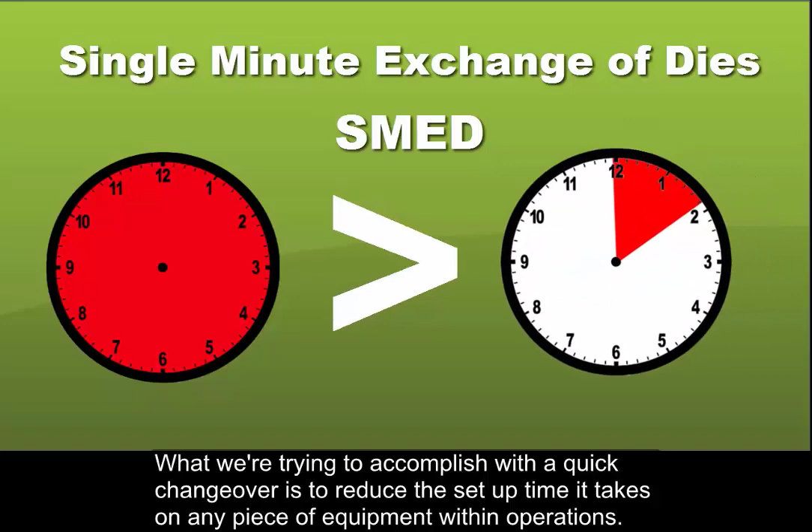What we're trying to accomplish with a quick changeover is to reduce the setup time it takes on any piece of equipment within operations. With this, what we're trying to do is get down into the single digits of time when we talk about single minute exchange of dies. So if you think about a single minute or a single digit, that's 9 minutes or less.

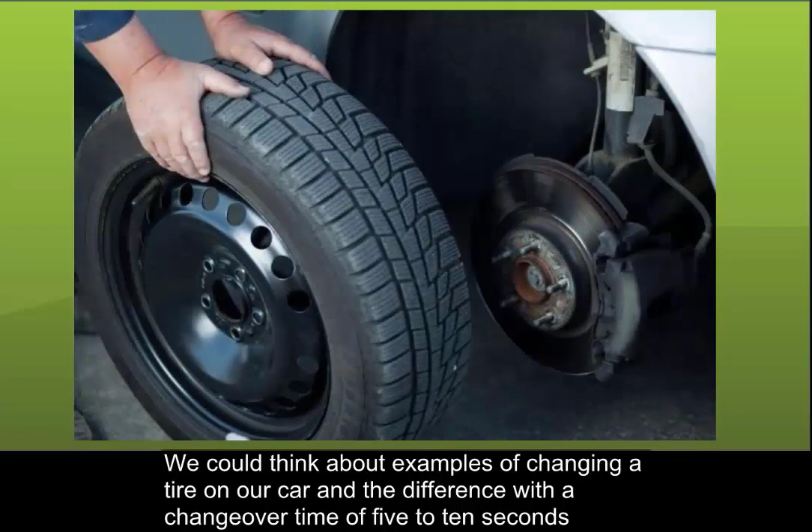We're trying to take changeover times that are often 4 hours, 5 hours, or longer and reduce those down to the single digits. So we could think about examples of changing a tire on our car, and the difference with a changeover time of 5 to 10 seconds if we think about pit crews.

SMED was developed by Shigeo Shingo at Mazda, Mitsubishi, and Toyota in the 1950s and 1960s. Shingo spent 19 years observing different setup operations in various factories. The methodology was initially developed to improve die press and machine tool setups.

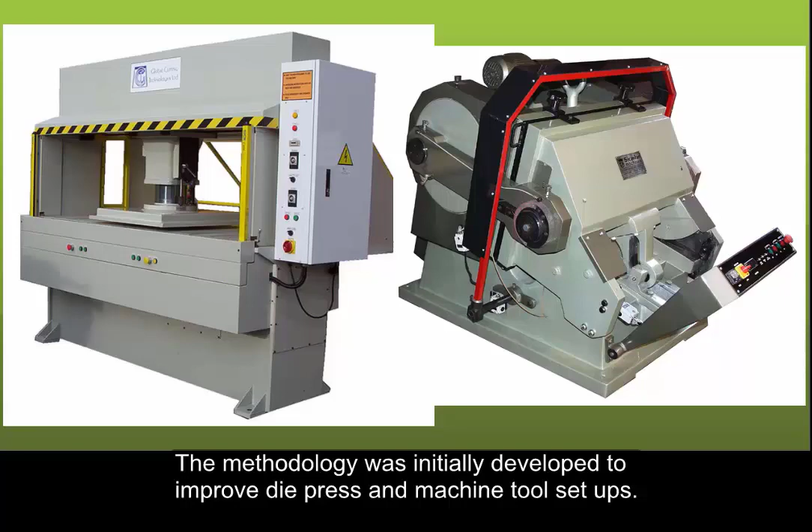These setups often took multiple hours, typically 6 to 8 hours, and the goal was to reduce this to a much shorter time in order to increase the number of changeovers and run products more frequently.

SMED is a key concept in lean operations because oftentimes the mindset is such that we don't want to change over and run a new product because a changeover takes too long. However, we can reduce that changeover to a much smaller time and down to minutes. Then we can change over and run products more frequently. And by running products more frequently, we can hold less inventory on hand.

Another key aspect of this is that we can meet customer demands quicker. For example, if a customer calls and they change their order today for what they want delivered tomorrow or the next day, we can change over quickly in a more timely fashion.

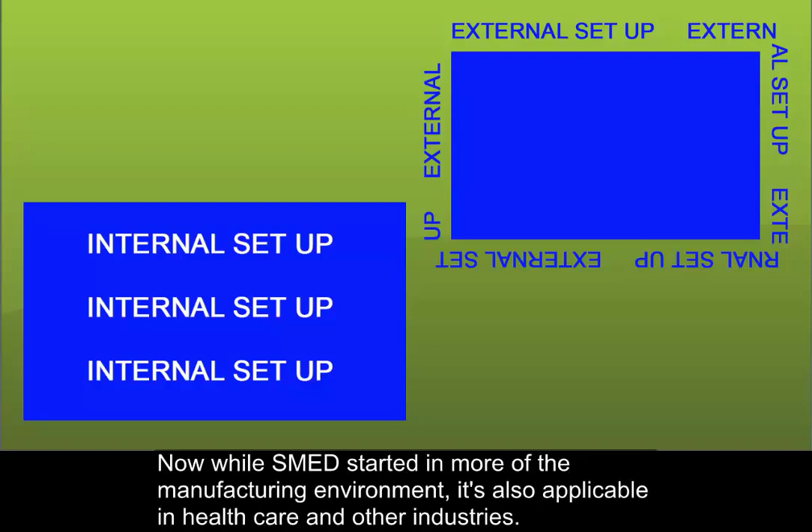There are two key points with SMED. The first is that setup operations can be divided into two categories: internal setup and external setup. Now, while SMED started more in the manufacturing environment, it's also applicable in healthcare and other industries. When we think about SMED, it's probably easiest to first think about it in terms of manufacturing.

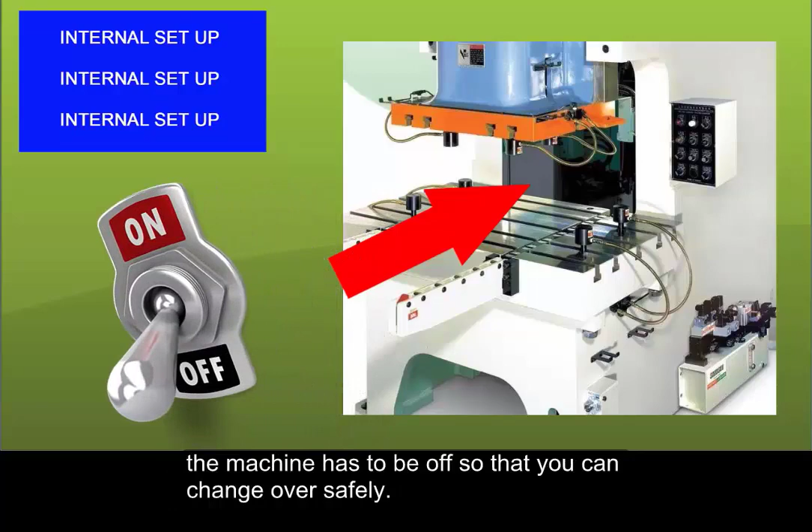With internal setup, these are changeover operations that are internal to the machine. What this means is, in order to make changes, the machine has to be off so that you can change over safely.

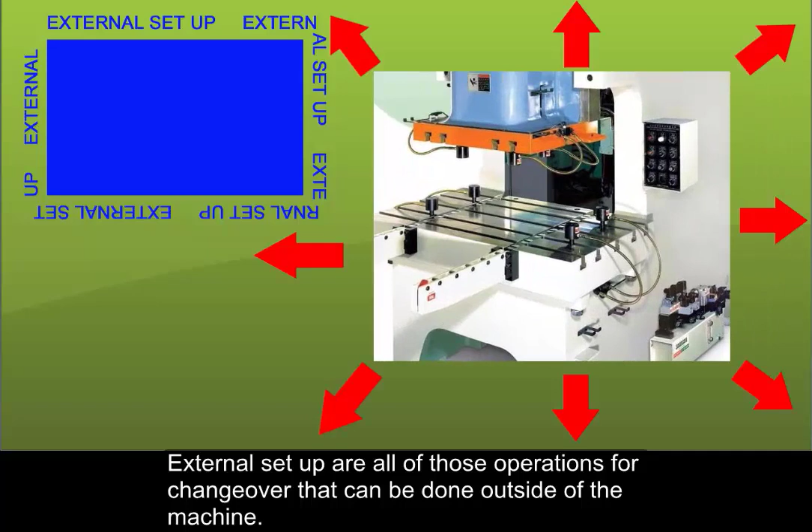External setup are all of those operations for changeover that can be done outside of the machine. For example, you can get all of the tools and equipment ready before you shut down the machine.

If we think about this in other industries such as healthcare, if we're changing over an operating room, there are certain things that we can have prepared outside of the machine, such as all of the instruments for the next procedure. These can be done externally.

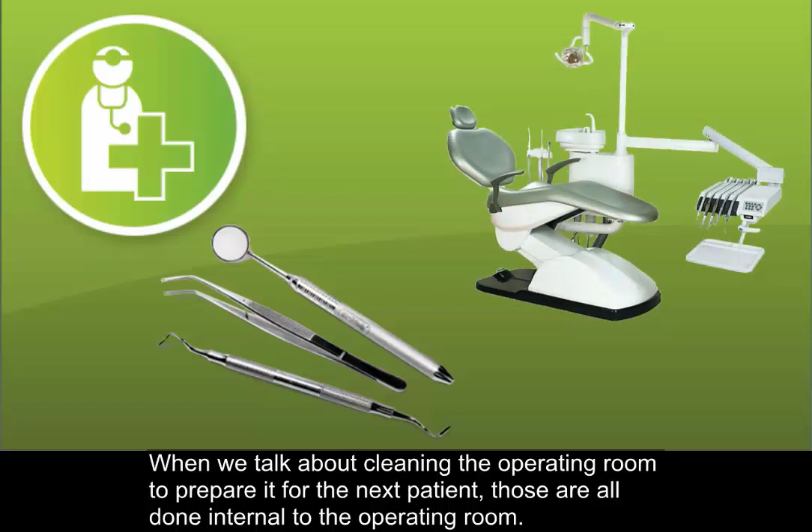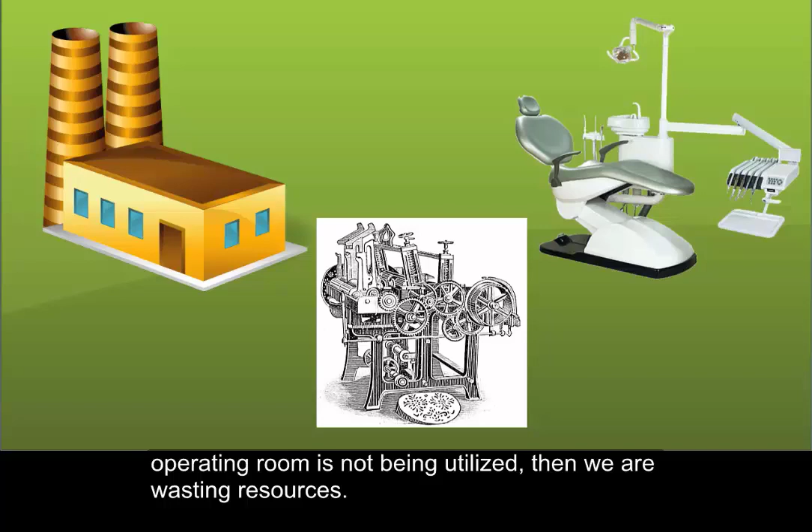When we talk about cleaning the operating room to prepare it for the next patient, those are all done internal to the operating room. Now, if we think about the common mindset within manufacturing, if a machine is down or a resource such as an operating room is not being utilized, then we're wasting resources.

Now, on the flip side, we also want to make sure that we're not overproducing, which is another waste within lean. This leads us to the second main point with SMED. Converting internal setups to external setups can substantially reduce the changeover times.

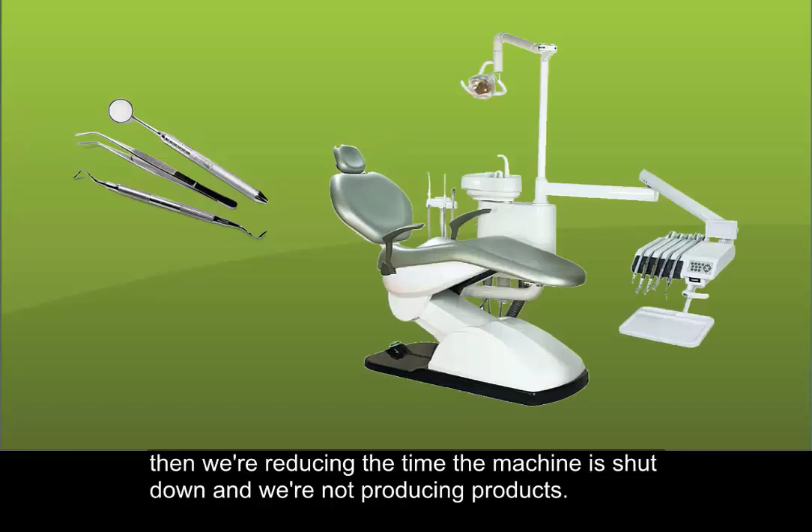If we can have all of the equipment and fixtures ready to go before we shut down the machine, then we're reducing the time that the machine is shut down and we're not producing products. And so we want to convert as much of the internal time to external time.

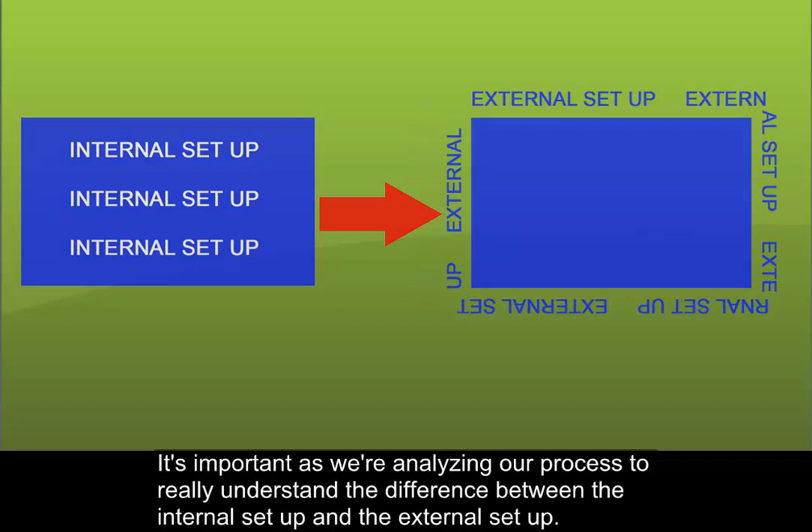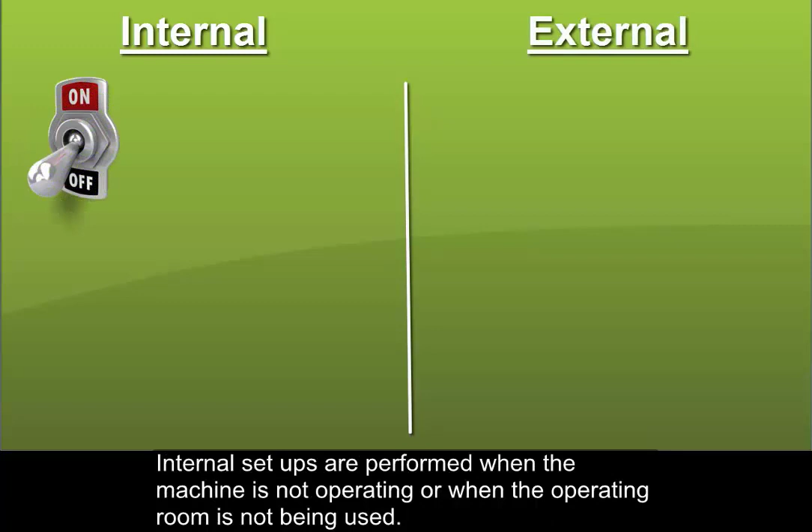It's important as we're analyzing our process to really understand the difference between the internal setup and the external setup. Internal setups are performed when the machine is not operating or when the operating room is not being used. External setups are performed while the machine is running.

In terms of healthcare, this would be setting up for the next procedure while the current procedure is finishing up. By converting our internal setups to external setups, we're reducing that overall changeover time, which increases the time that machines can operate or resources can be utilized.

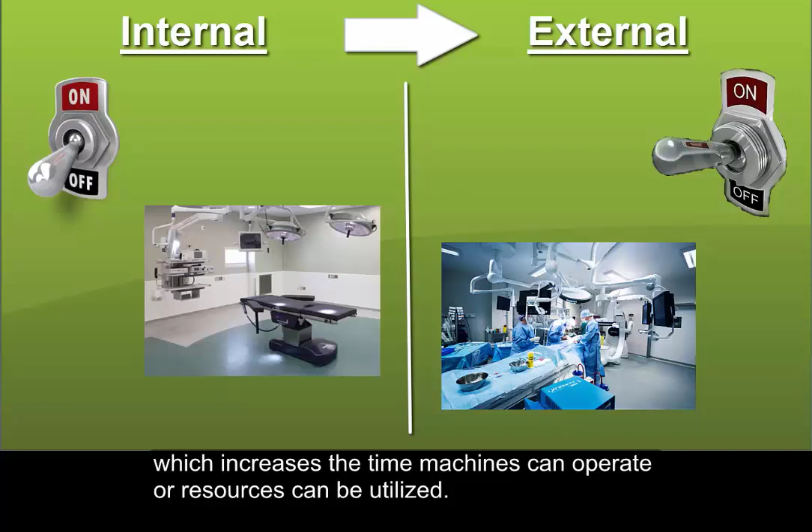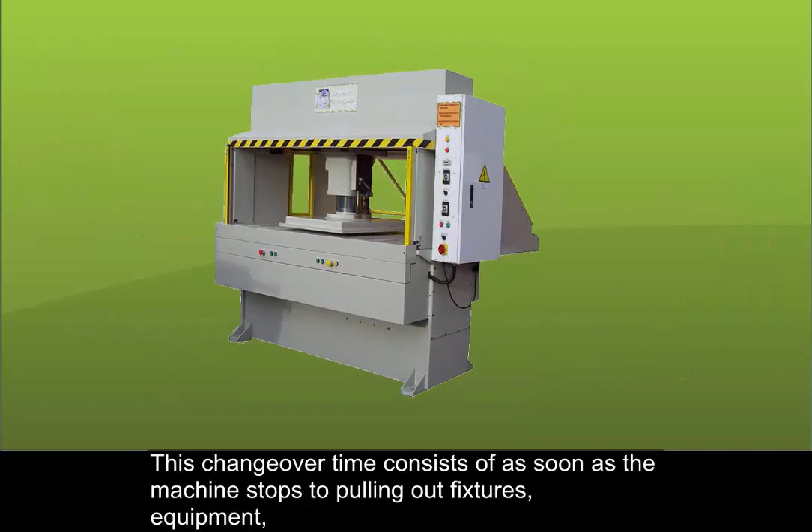Another key aspect is when we look at our changeover time, our total changeover time is captured from the last good piece of one product to the first good piece of the next product. Any time between that is time that's lost. It's wasted time.

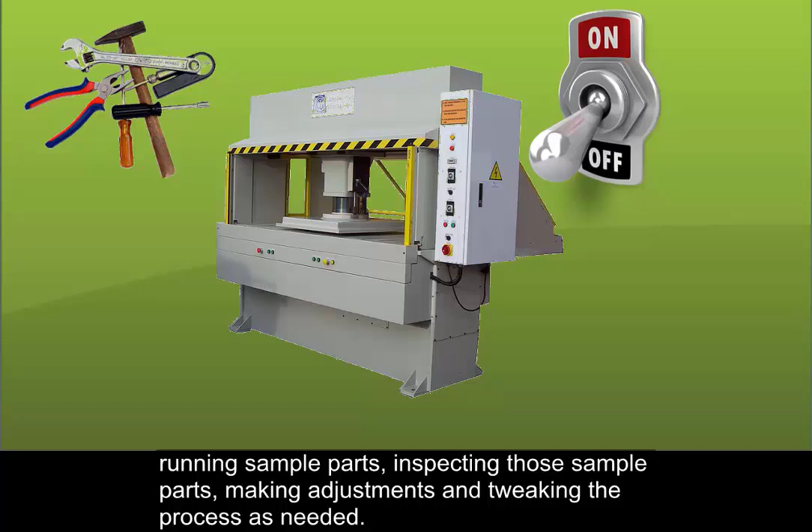This changeover time consists of, as soon as the machine stops, pulling out fixtures, equipment, running sample parts, inspecting those sample parts, making adjustments and tweaking the process as needed, and then re-inspecting parts until the process is finally able to produce a good part. The goal then is to reduce that overall changeover time.

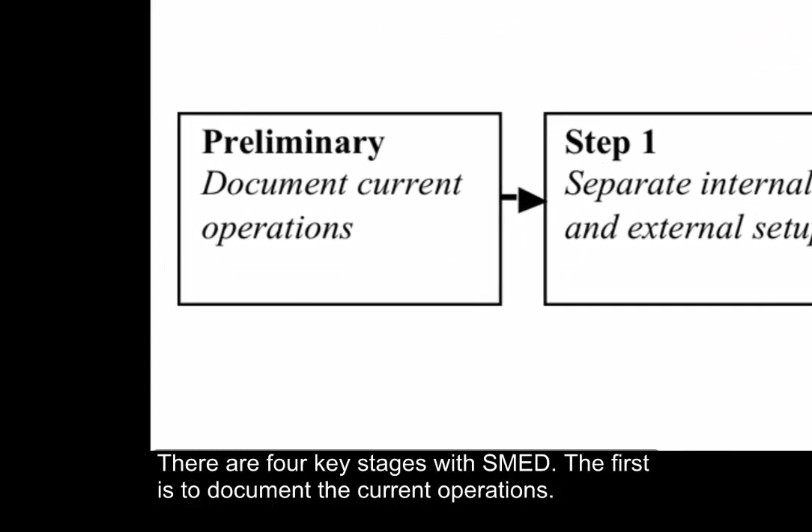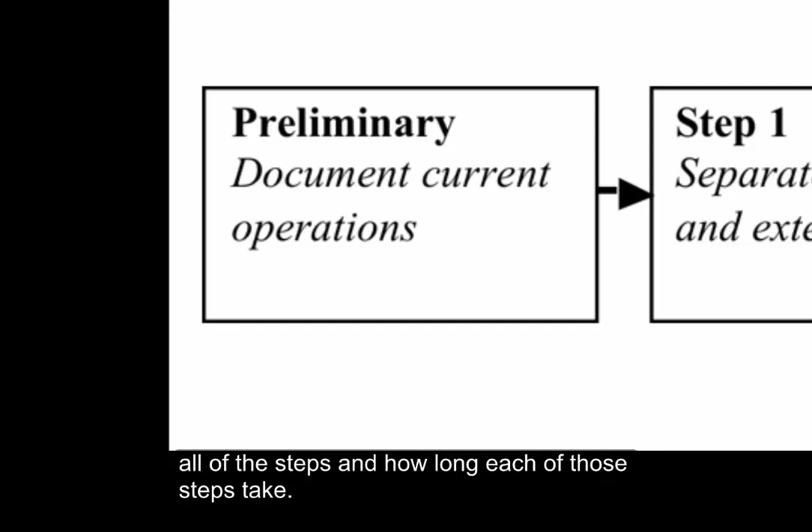There are 4 key stages with SMED. The first is to document the current operations. One best practice would be to videotape the current operations so that you can get a detailed analysis of all of the steps and how long each of those steps takes.

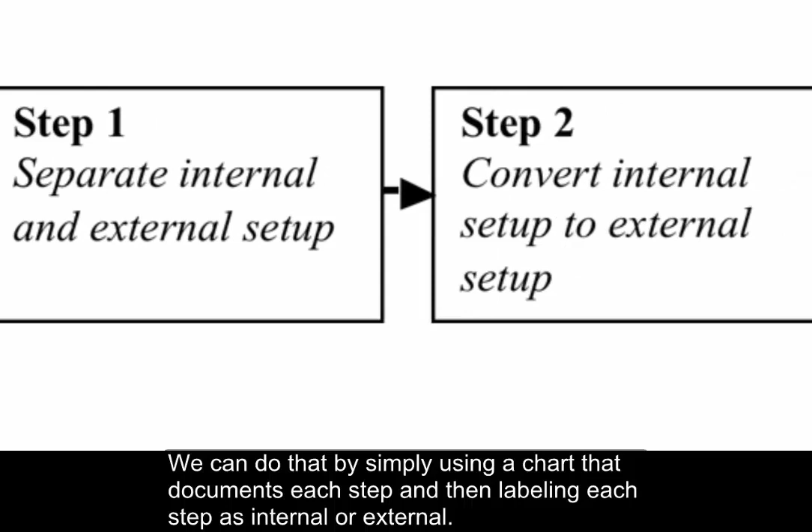The next step is to separate the internal and external setup time. We can do that by simply using a chart that documents each step and then labeling each step as internal or external. The second step then is to convert as many internal setup times to external setup times as possible. Then the final step is to streamline the setup operations.

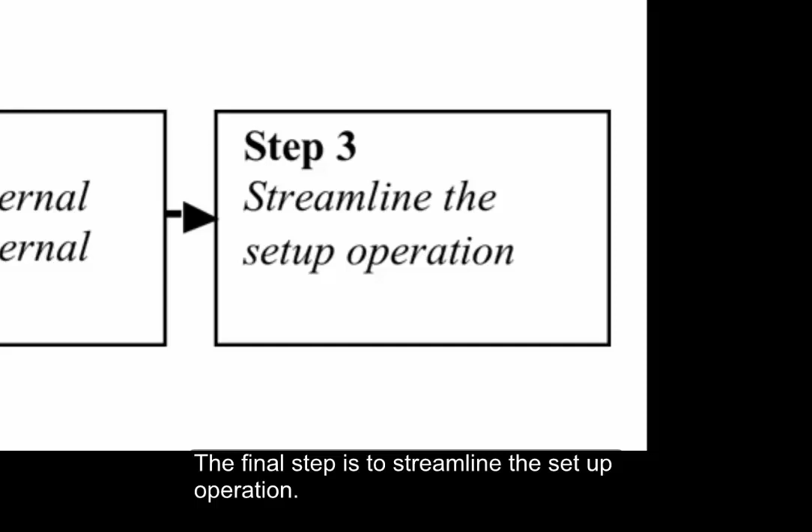In documenting the process for SMED, a simple chart referred to as the setup analysis chart can be used to document and analyze the process.

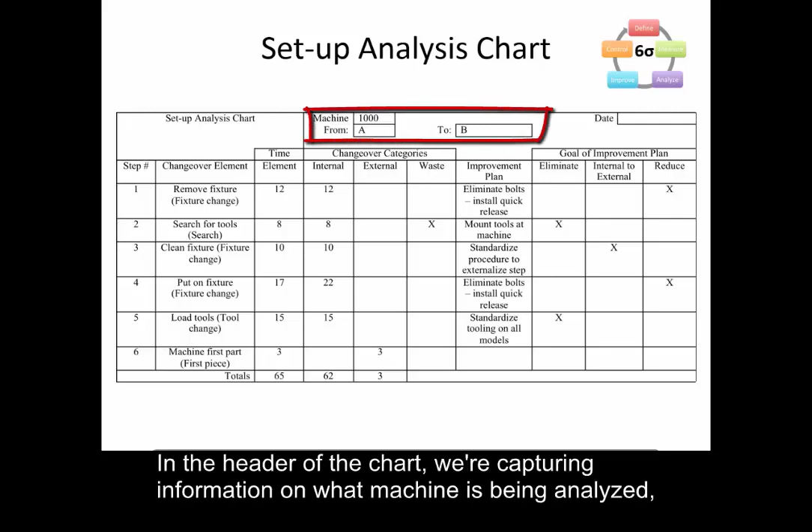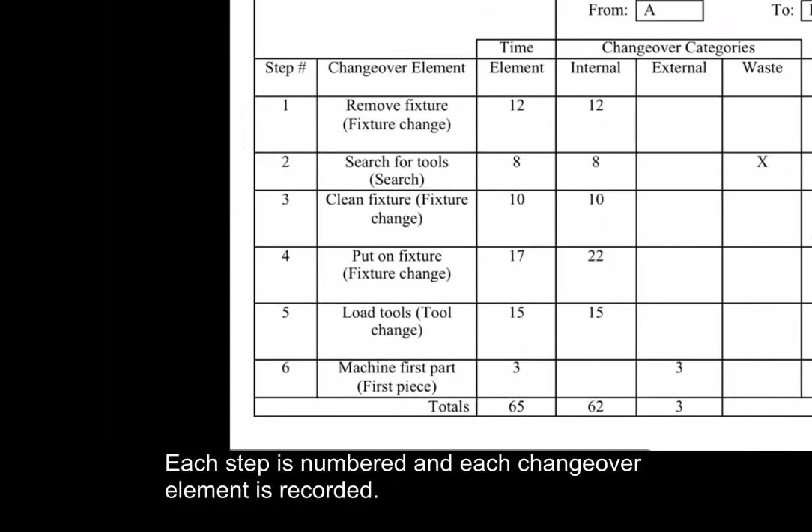In the header of the chart, we're capturing information on what machine is being analyzed, what product is currently being run, and what product you're changing over to. Then each step is numbered and each changeover element is recorded.

And then the time for that changeover element is recorded, and then it's captured by each of the changeover categories, which include internal, external, and waste.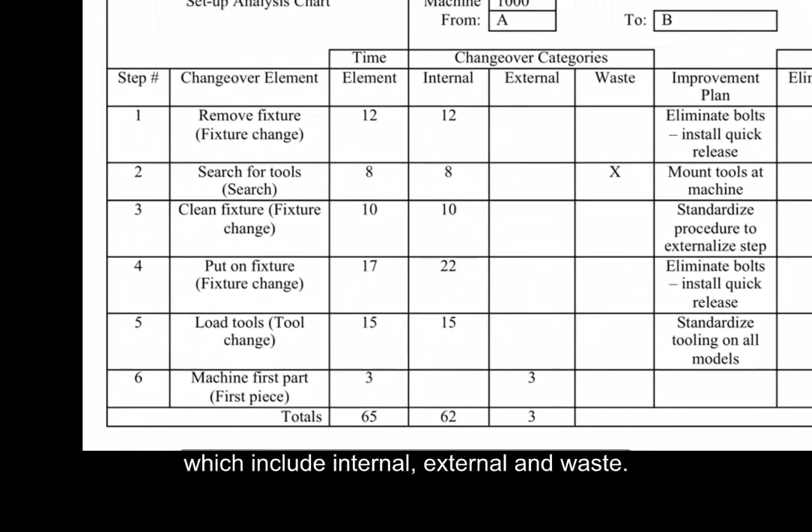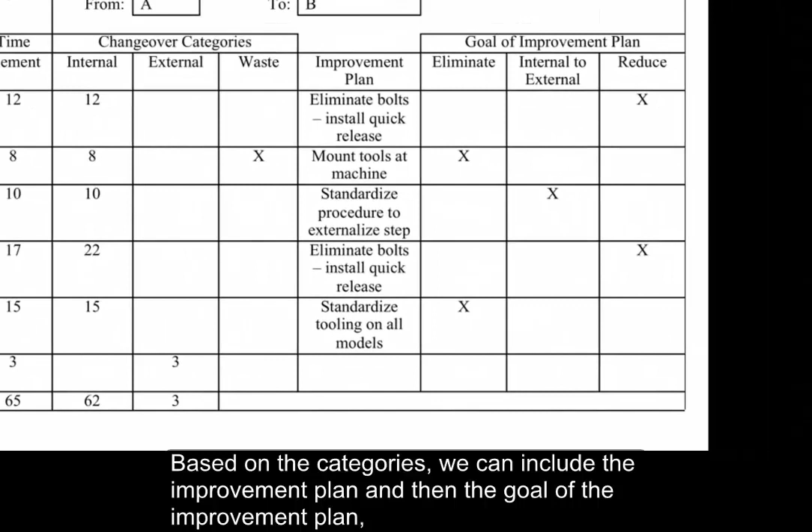Based on the categories, we can include the improvement plan and then the goal of the improvement plan, whether it's to eliminate that aspect, change it from an internal to an external setup, or to reduce that time.

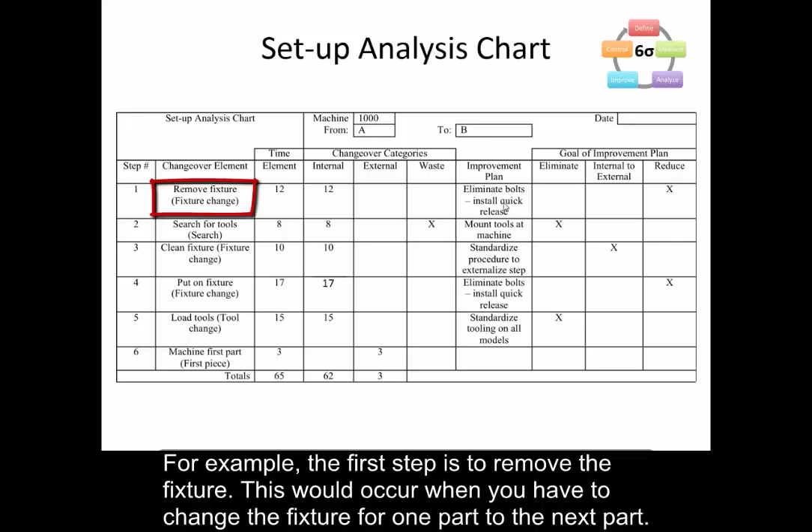For example, the first step is to remove the fixture. This would occur when you have to change the fixture for one part to the next part. This changeover element currently takes 12 minutes, and all 12 minutes of this element are internal time.

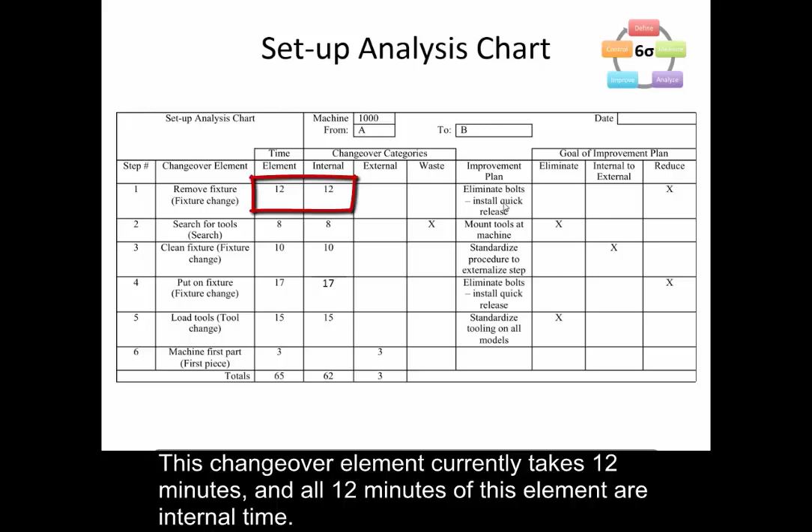The improvement plan from the team is to eliminate the bolts and install quick releases. Therefore, the goal of improvement for this changeover element would be to reduce the time from the 12 minutes.

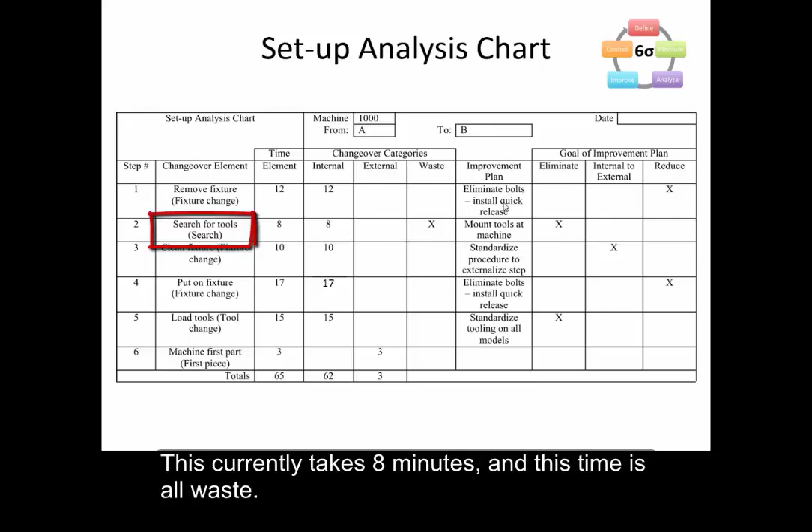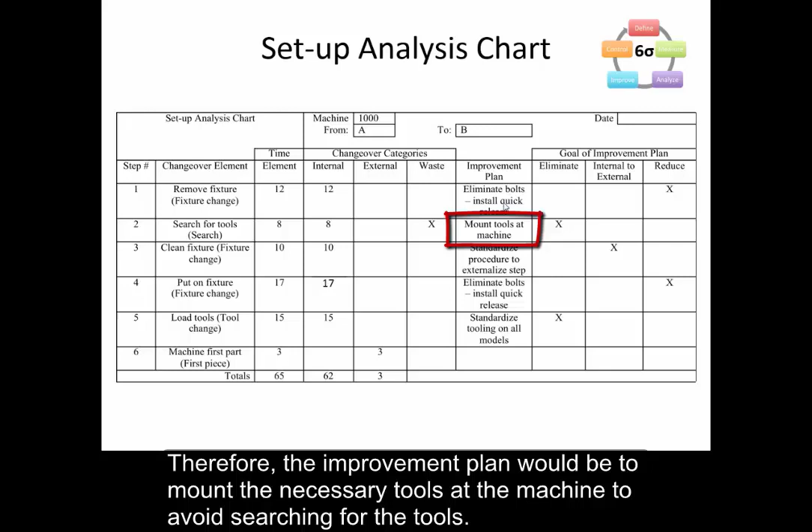Another example would be step 2, in which the team searches for tools. This currently takes 8 minutes, and this time is all waste. Therefore, the improvement plan would be to mount the necessary tools at the machine to avoid searching for the tools. The improvement plan then would be to eliminate this time.

Using this information, the team could also do a Pareto analysis based on the major categories. In this example, the major categories were fixture change, tool change, search time, and the first piece. As a side note, the first piece typically refers to the first part that's run through the process that's used for 100% inspection to ensure the changed over process is making good parts.